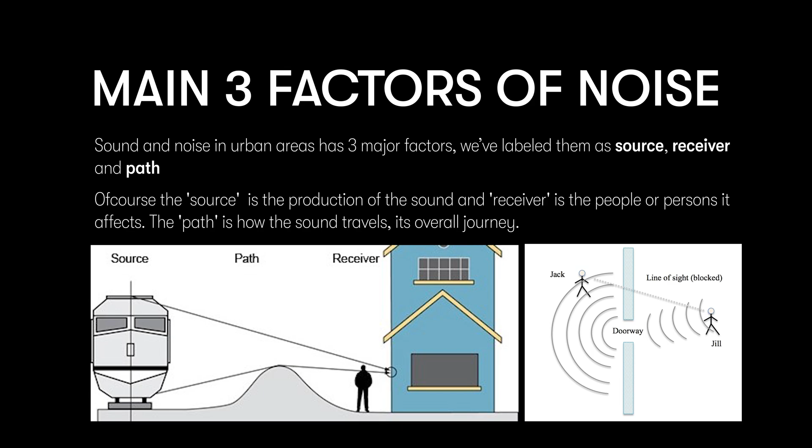Finding an SRP model, we found the three main factors of sound, and therefore noise, as the source, path, and receiver of sound, which ultimately plays a key part in people perceiving sound as noise.

We now looked at case studies to find real-world solutions and effective ways to address noise in urban areas.

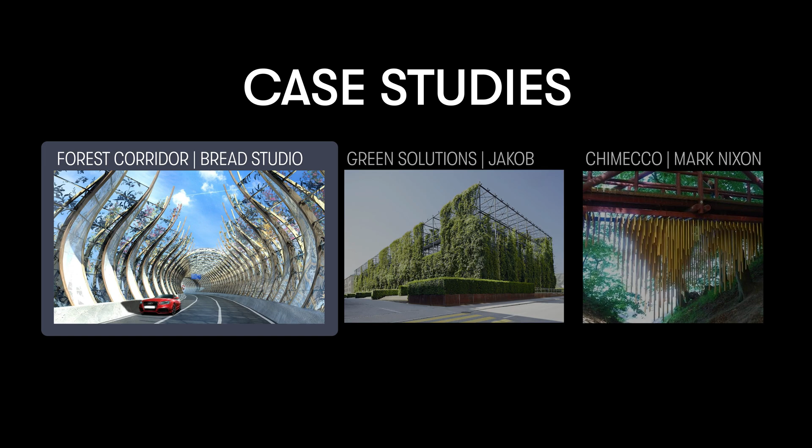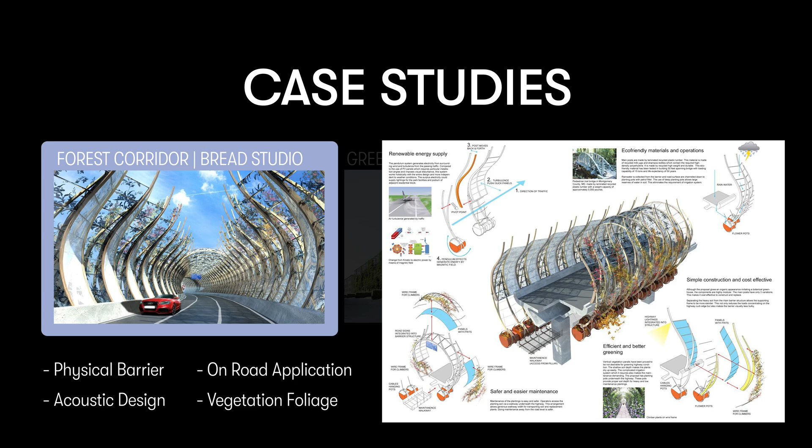Forest Corridor by Bread Studio is a case study that we looked at which uses a physical barrier as a means to respond to noise on busy roads like freeways and arterial roads. It also has an acoustic design to keep sound in.

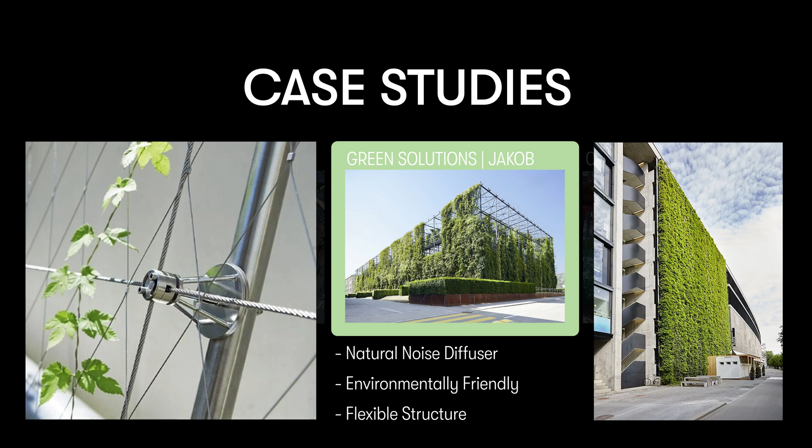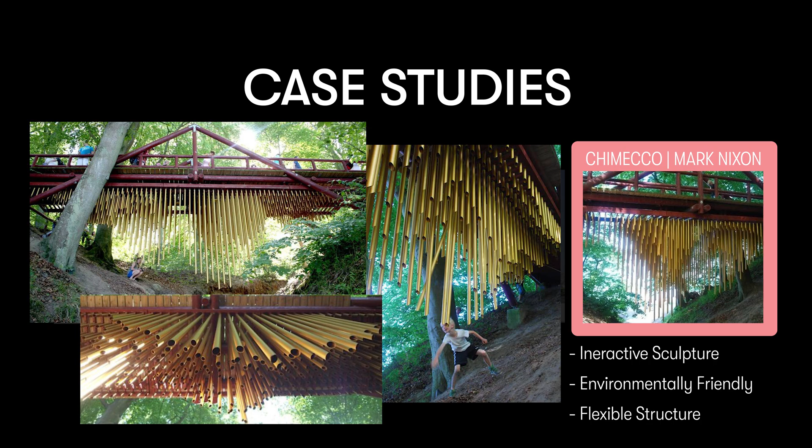Another important case study was Chimecco by Mark Nixon. Here, the process of addressing noise is to use chimes to create a pleasant sounding vibe to soften the noise.

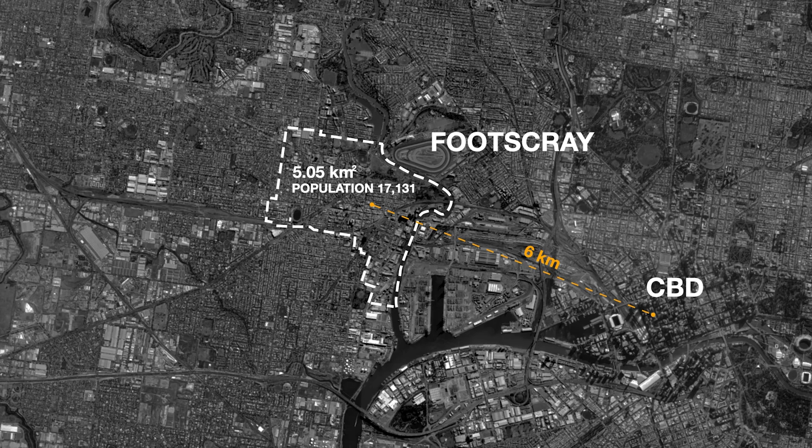Located in the western part of Melbourne, Footscray is a culturally diverse and lively suburb with an area of 5 square kilometers and a population of around 17,000 people. Footscray is located just 6 kilometers from Melbourne CBD. It's known for its vibrant community, rich cultural experiences, and a variety of international influences.

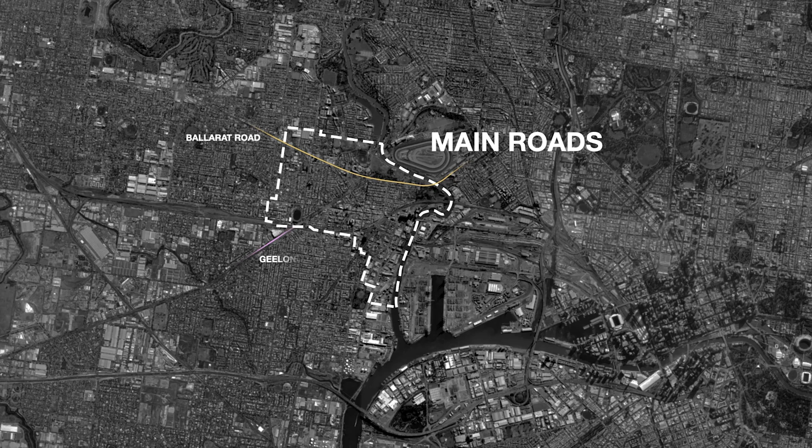In Footscray, Ballarat and Geelong roads are the lifelines connecting you to the heart of Melbourne. But it's local arteries like Barkly, Hopkins, Droop, Gordon, and Moore streets that weave through the vibrant suburb, offering a glimpse of the diverse and lively culture that defines Footscray.

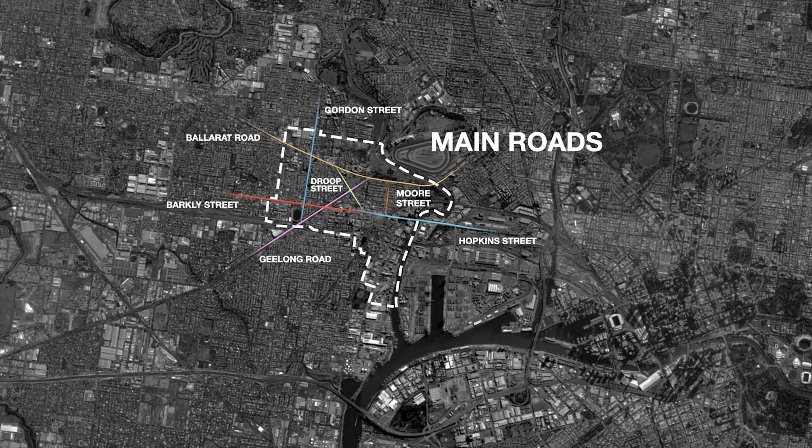In Footscray, the demographics paint a dynamic picture of the community. The majority of residents are between the ages of 25 and 50, fostering a youthful and dynamic community. Most households consist of 2 or 3 people, promoting a strong sense of togetherness. Impressively, 93% of the population is actively employed, whether full-time or part-time, showcasing the suburb's economic vitality and opportunities for its residents.

To begin our proposal, we found the main contributing factor for noise pollution in Footscray, and not so surprisingly, it was cars. Not that one, but the roads filled with them that surrounded the places that we visited.

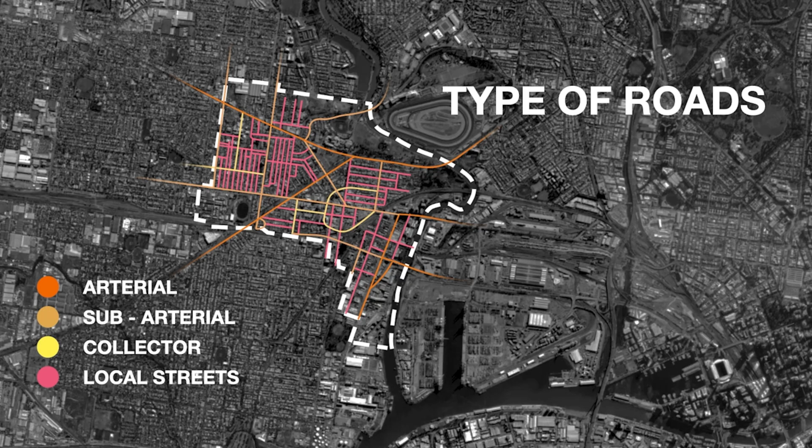As Juan showed in our site visit and analysis, there are various road types that cut through Footscray. We found when calculating the average decibels all over the site that arterial and subarterial roads produce the most noise, concluding that the amount of cars and the speed of cars has the greatest effect on noise in urban areas.

We assigned 4 systems to address this issue in different urban contexts. System A is artificially made as it is a physical barrier. System B, however, is natural as we use greenery and vegetation. System C is based around turning noise into pleasant sound. And lastly, System D changes the road structure with removal of lanes or roads altogether.

The systems A to D just mentioned have been placed all around our site where existing conditions can benefit most from our proposed systems. Here, we kept 8 lanes, but put a physical barrier between the noisy, busy main road and residential service road.

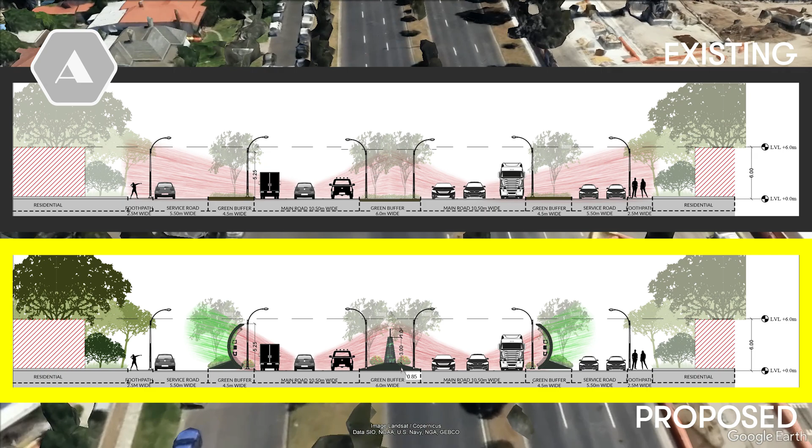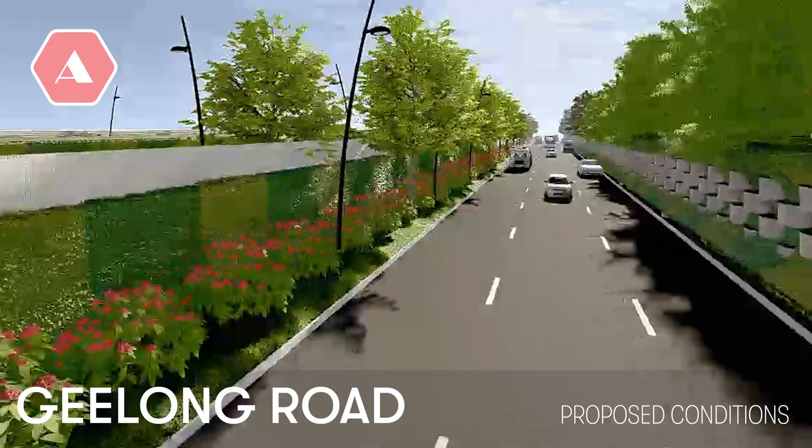On Ballarat Road, a portion of the built area is tall and long, deflecting sound waves. As stated in case studies, with the addition of a living green wall, we can expect up to 20% reduction in noise.

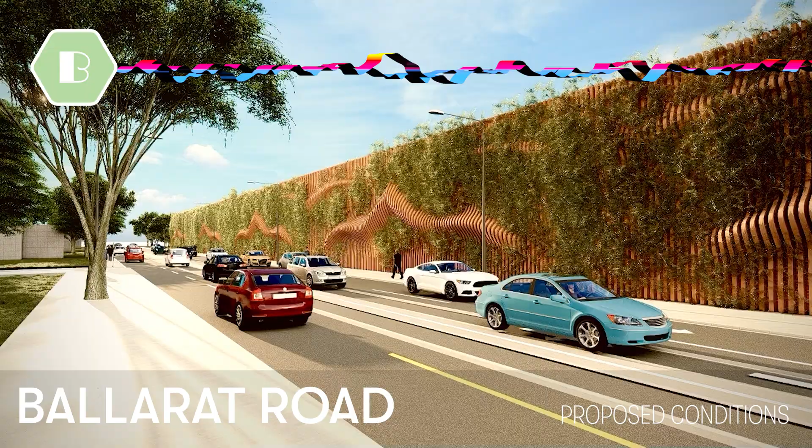Further down Ballarat Road, entering Lynch's Bridge, certain areas of the walking path have no protection from road noise. A chime sculpture will help soften this.

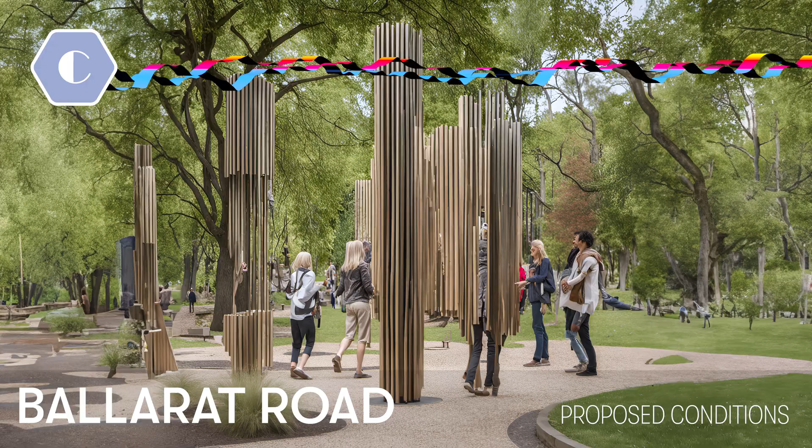Lastly, with the removal of the road on the southern side of Droop Street, the unnecessary noise from cars can be replaced by people conversing.